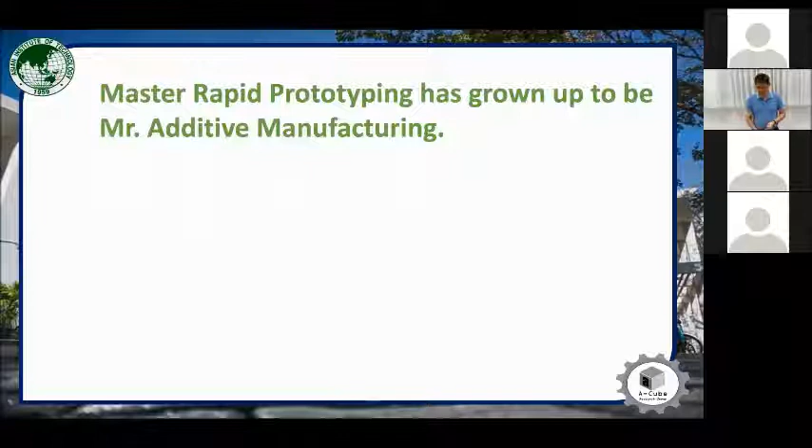If we think of additive manufacturing as a person, additive manufacturing today is an adult who, if in industries, would be at the senior, engineer, or manager level. If additive manufacturing is in academics, we have Doctor Additive Manufacturing. From the beginning, we have had Master Rapid Prototyping. Master Rapid Prototyping has grown up to be Mr. Additive Manufacturing, and today Rapid Prototyping is 31 years old.

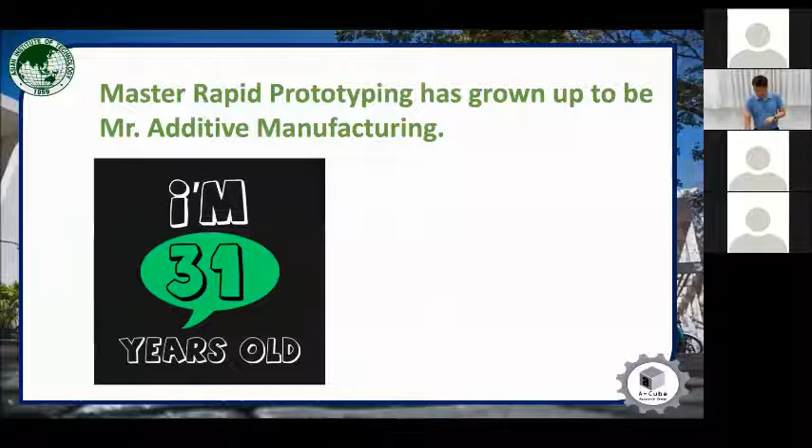With the process of rapid prototyping, we create an object layer by layer from the ground up. But the question is, if we look at accessibility, do we have the same manner, where there is a connection from the ground up, from the kid up to the professional level? The question is: who has had access to additive manufacturing?

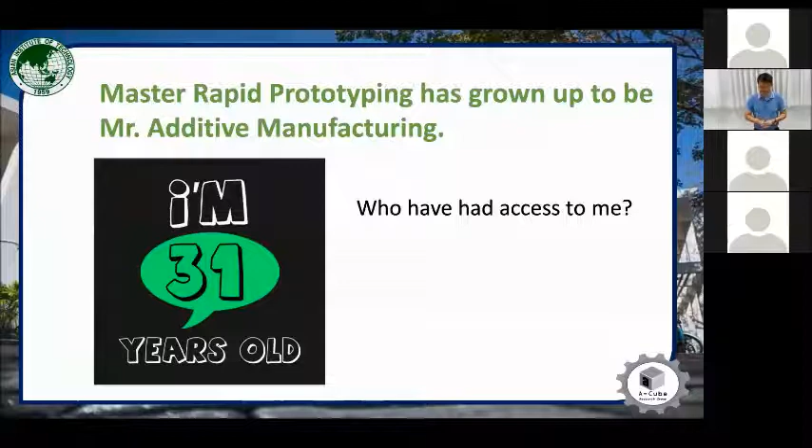Well, in the old days, when we started introducing rapid prototyping, we had SLA in '88, SGC, and FDM in '91. We had SLS in '92 and 3D printing in '93. During that period, when we started introducing rapid prototyping, we had big, very expensive machines, and accessibility was limited to professors and researchers at top research universities as well as research institutes. It might also be that some big companies had access to these types of technologies.

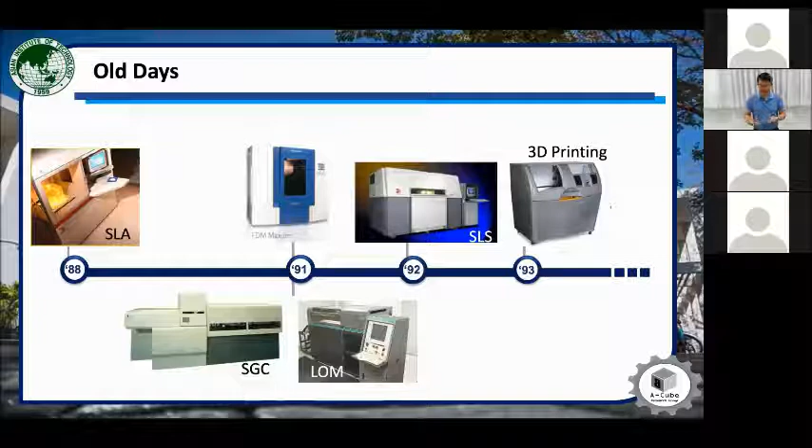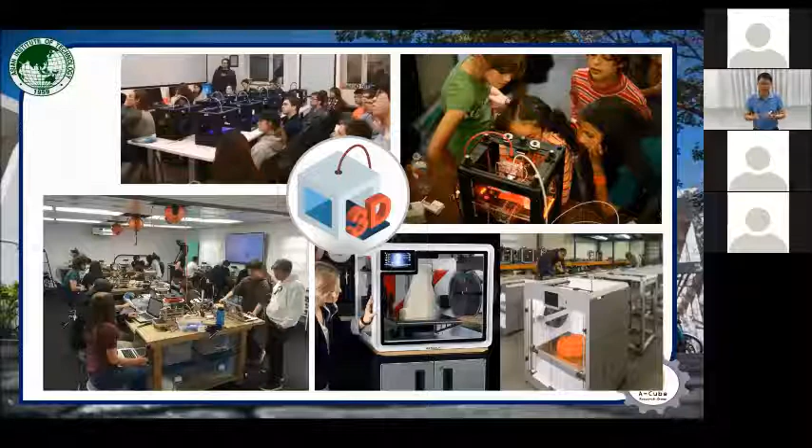This technology has progressed day by day, and because of its potential, many tried to develop their own. But the growth of rapid prototyping was not that much until the beginning of this decade, when the patents for all the IP expired. From that point, you start seeing that many more people have access to rapid prototyping or 3D printing. From having a unit at a research university, now we can have rapid prototyping or 3D printing in a classroom, in a teaching university, even in schools. We can also see these technologies not only in a big company, but also in a small and medium enterprise.

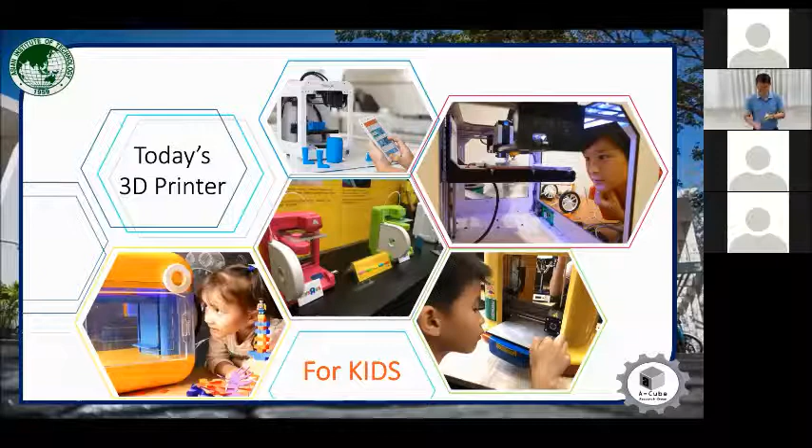You can also see that the trend of rapid prototyping will not be only for commercial purpose or research purpose anymore, but it will gradually go to the level that even kids can play with it. One day 3D printing will be in our home, just like we have a microwave.

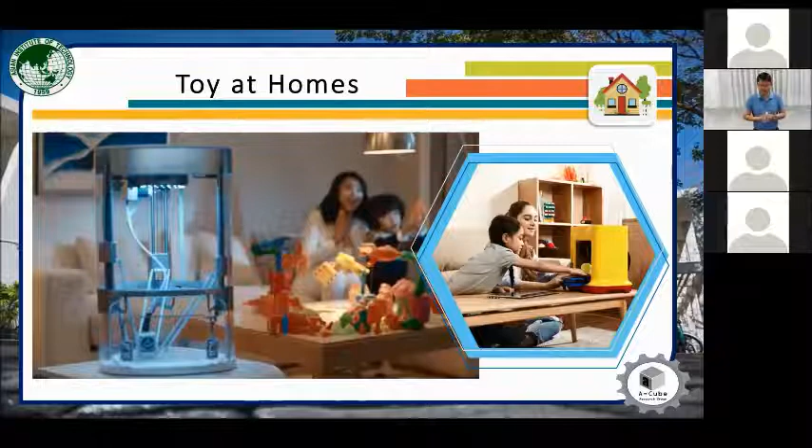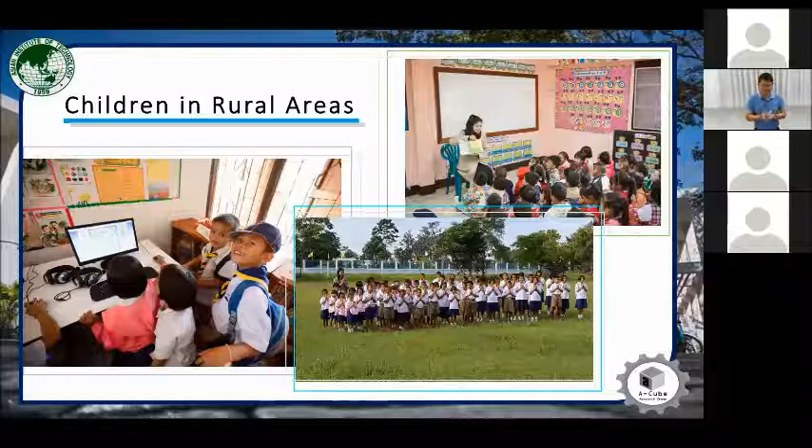But the question is, how about for this group of kids that live in remote areas? Will they have the opportunity to enjoy the power of these 3D printing technologies? In order to have that, what can we do? The question will be, will we be able to bring this unit of inexpensive rapid 3D printing to our kids? The price of this unit these days will probably be around $500. But with this unit, can it be sustained for kids in rural areas? Sustainability becomes an issue that we have to address.

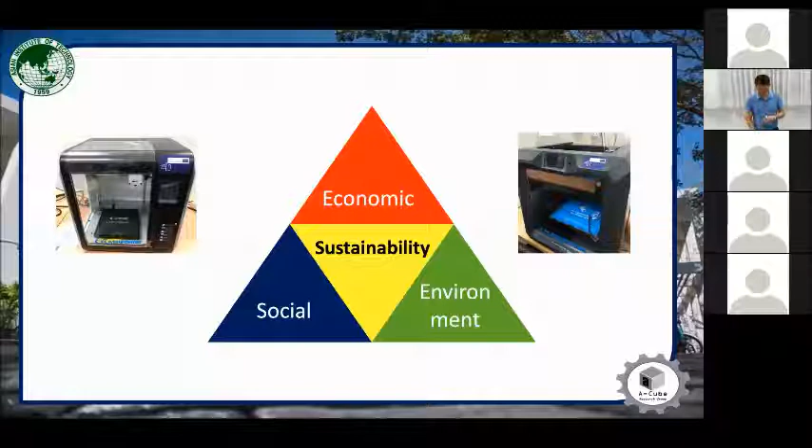When we talk about sustainability, there are three dimensions: economics, social, and environment. For the social dimension, of course it's not an issue, because our kids can express their creativity and interact with each other, and because of that we can help build the future human resource for the countries or societies. In terms of environment, the material used in this process is non-toxic, so in terms of sustainability and environment, it will not be an issue.

But in terms of reuse, we have questions, because these days the material we often use will be PLA or ABS. Even though PLA is biodegradable, it will take some time before all the material is decomposed.

But what's more important will be in terms of economics. What we need are inexpensive systems or machines such that kids in rural areas can use. In terms of the machines, I think right now the machine is not that expensive, but the question is, can we sustain the usage of this machine for kids?

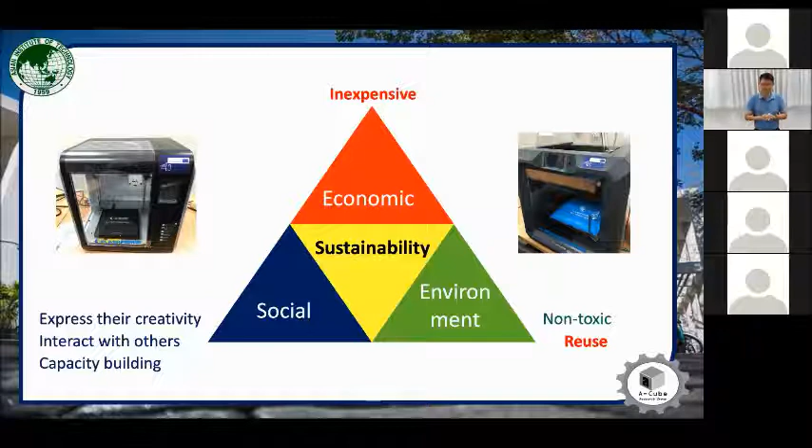Because the problem kids will have to deal with is about materials. Materials like PLA or ABS are consumable, and you have to replace them one after another, just like with a printer. The price of the printer itself is not expensive, but you have to pay much more money for the ink. Similarly with 3D printers available in the market, the machine itself is not expensive, but you have to keep buying materials, one spool after another spool.

The question for schools in rural areas: how much budget will they have? Will they have a budget such that they can allow kids to use the machines every day, whenever they want? This will not be possible, simply because the budget for buying material for kids to play will be very limited. So in terms of sustaining accessibility for kids, it's not an issue of the technology, but an issue of running the technology, and what needs to be done is we have to explore.

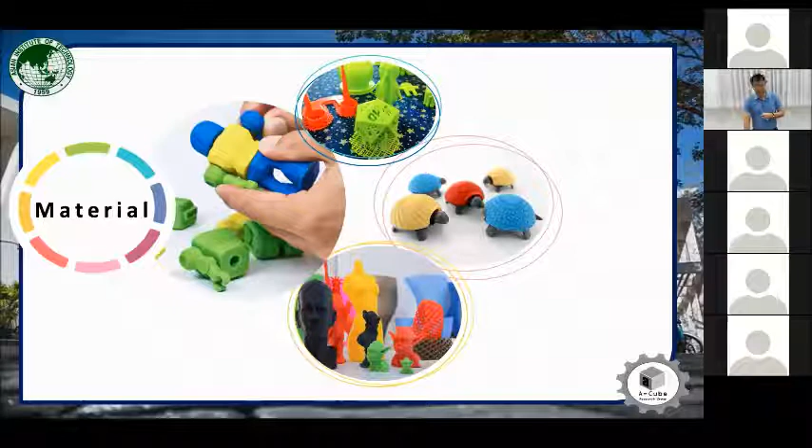We have to find another type of material that can allow our kids to keep playing day after day, which should not be PLA or ABS. We then started exploring, and believe it or not, the material we found is something you're also familiar with - modeling clay.

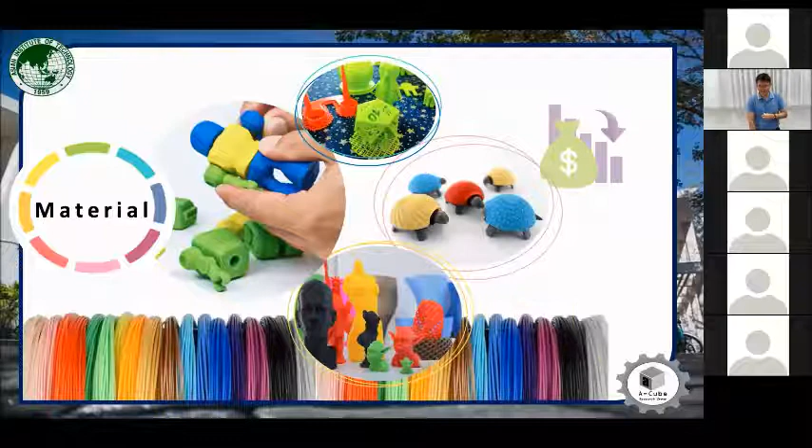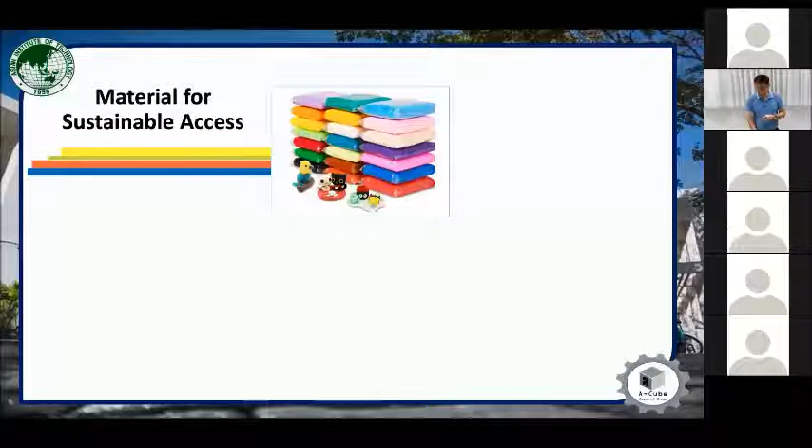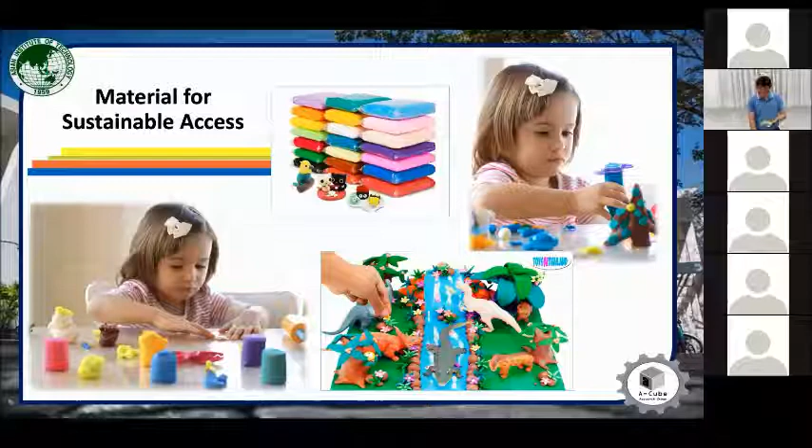The material for sustainability, or sustainable access, is modeling clay. This clay or plasticine is a material we all played with when we were children. With these materials, you can bring in your creativity and start making things, building things one after another, creating a story and enjoying it. When you get bored, you just squeeze it out and remake it into another thing. With this type of material, kids will start with their imaginations.

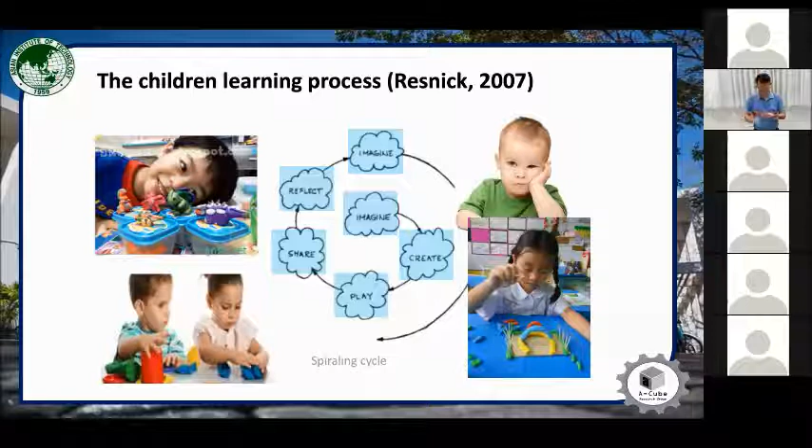Then they will start creating with their hands. They will play with this unit and share the toys with others. Then they reflect on what they have just learned, and the process of kid learning will be spiraled to the next level. You will see that with these types of materials, kids can always play and always express their ideas.

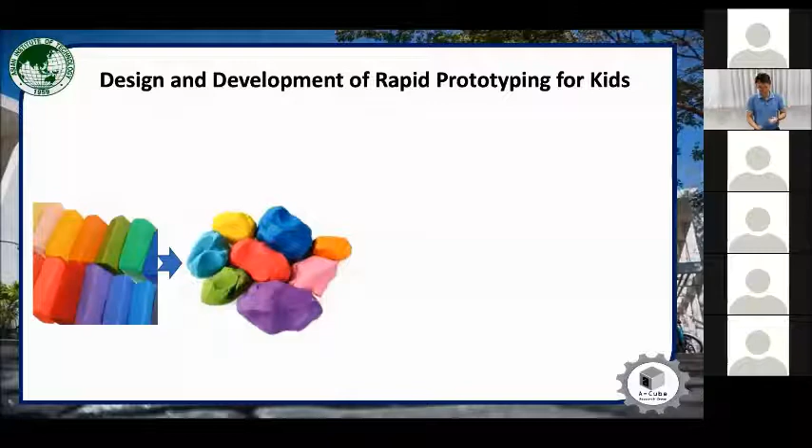And if we bring this modeling clay into the equation of rapid prototyping or 3D printing, then what we need to do is unpack all these pieces of modeling clay, squeeze it, and put it into a tube. Then what we have to do next is basically extrude it.

Can this idea be implementable? That is a question. So if we can do that, then there is a chance that we can use this type of material in our extrusion-based rapid prototyping for kids to play.

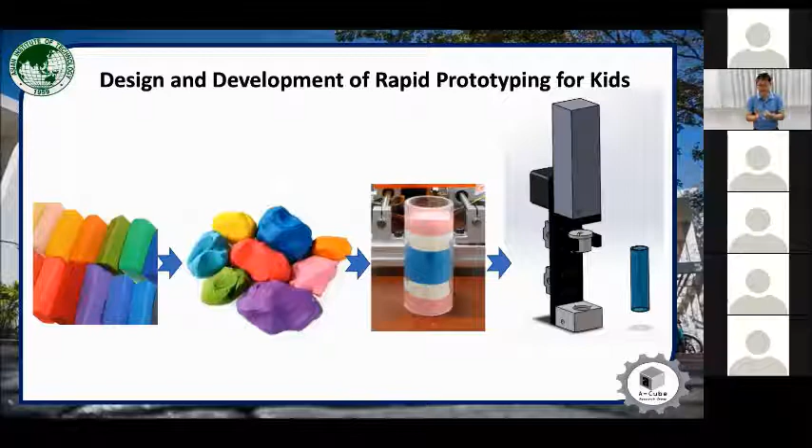From this kind of idea, we then start exploring. We start building out CAD models of a unit. You will see that a unit is not that fancy stuff - it's just a basic, simple unit that has a plate that moves in the XY directions. If we move in the Y direction, then the nozzle head will move in the X direction, and the whole unit can be lifted up and down in the Z direction.

If we just extrude the material through that nozzle, then we can start laying down the material just like FDM. From this idea, we can convert it into 3D printers for kids, which might look like miniatures.

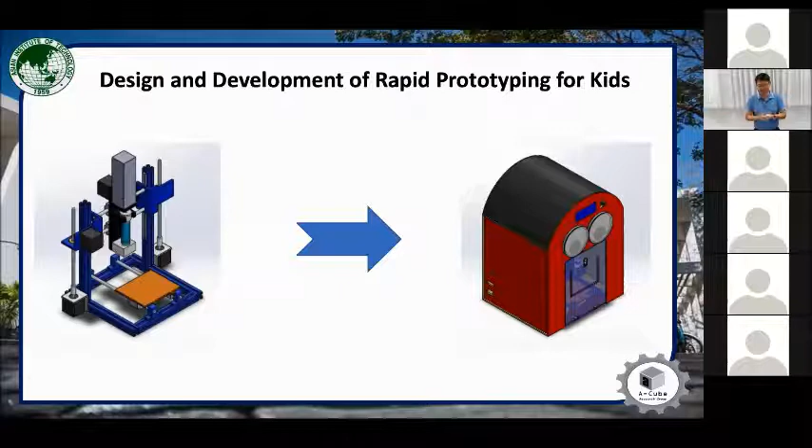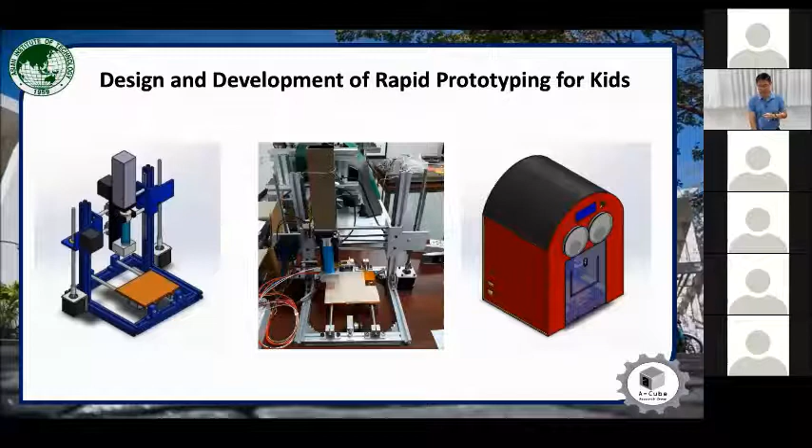When we start building up this unit, what we did next is investigate process parameters to see whether or not we can really make an object from this modeling clay through the concept of rapid prototyping.

So from this point of view, we're seeing that if we're going to make it happen, one of the things we need to do is heat up the base before we start the process.

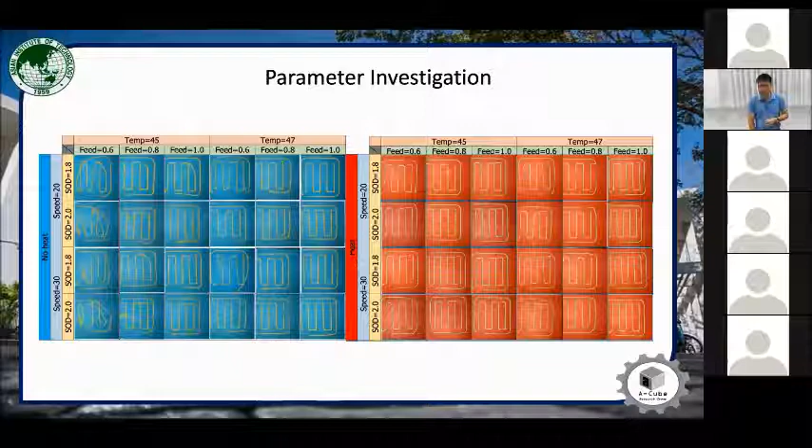Then we moved on and looked into what should be the speed, what should be the feed rate, and how about the temperature we should use to melt the modeling clay. We investigated all of these things just to see which kind of pattern would be the most appropriate.

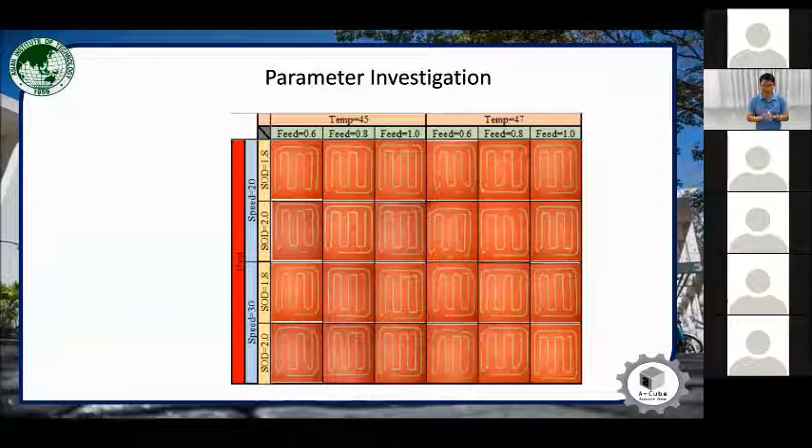We then conclude that at this point, with the temperature around 45 degrees Celsius, a feed rate of 80%, a speed of 30 millimeters per second, and a standoff distance of about 1.8 millimeters from the collectors, and if we also heat up the collectors, we should get a good looking pattern on the collectors.

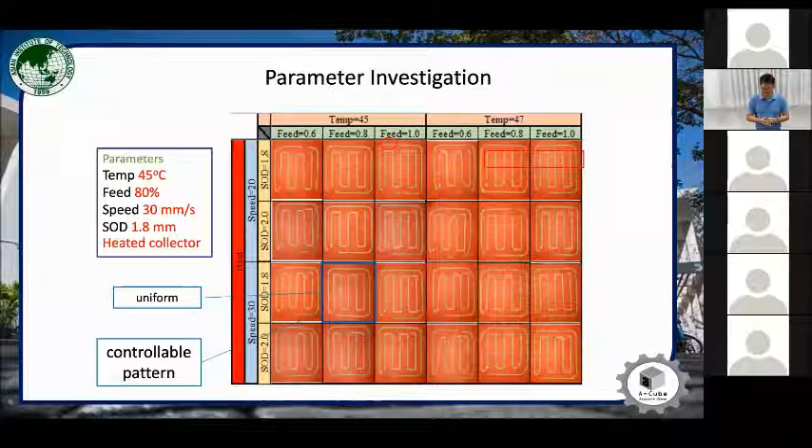Kids can explore from the websites, search for the model that they like, or if they have the abilities, they can start working on designing all these things by themselves and then load onto the machine.

At the end, we just print modeling clay. With modeling clay, when you don't like it, you just squeeze it, put it back into the tube, and reprint it again and again. One pack of modeling clay will cost you less than 50 cents, so kids can keep playing one after another. With that, there is a high chance of sustaining accessibility for kids to use additive manufacturing.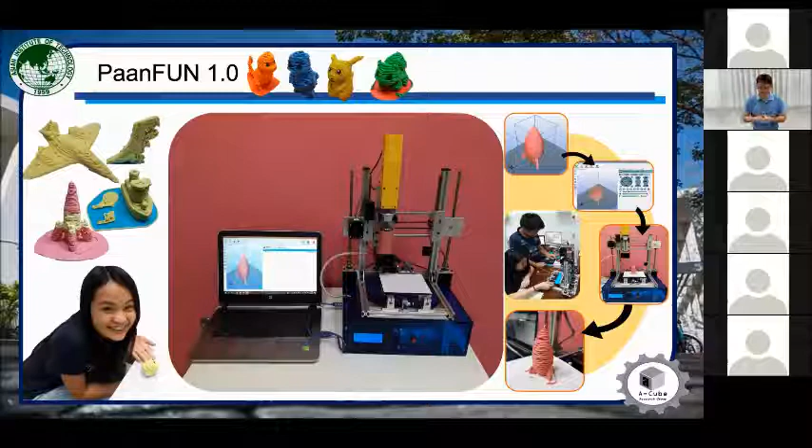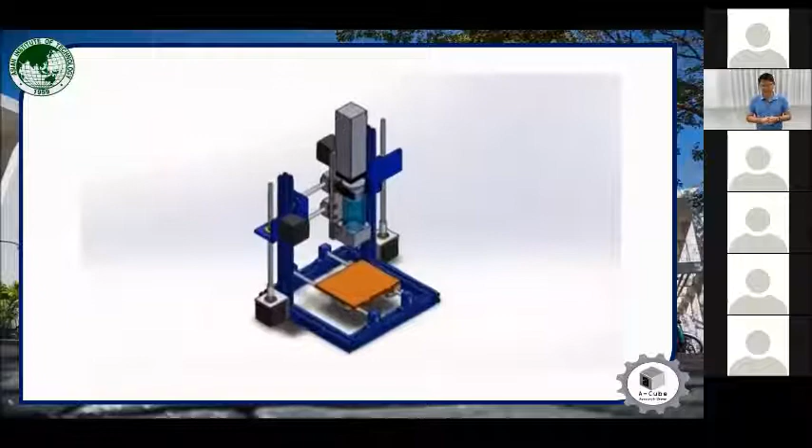What I want to show you here is how the unit is working. We call this unit PaanFUN, a Thai name meaning 'shaping a dream.' This is the design of the unit I showed you, and this is a prototype we built based on that design.

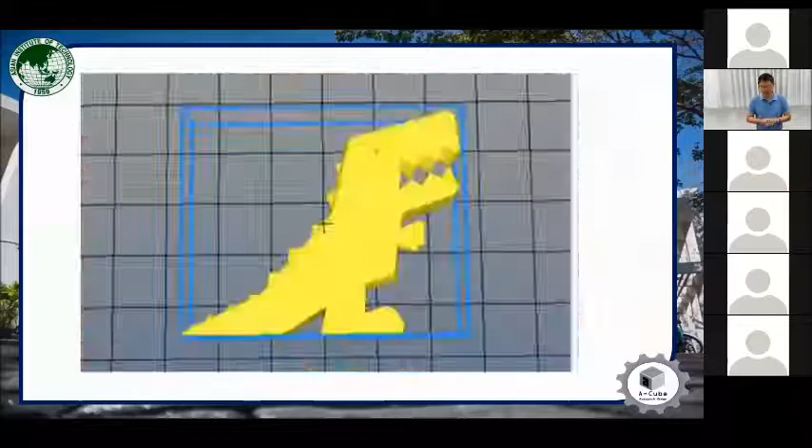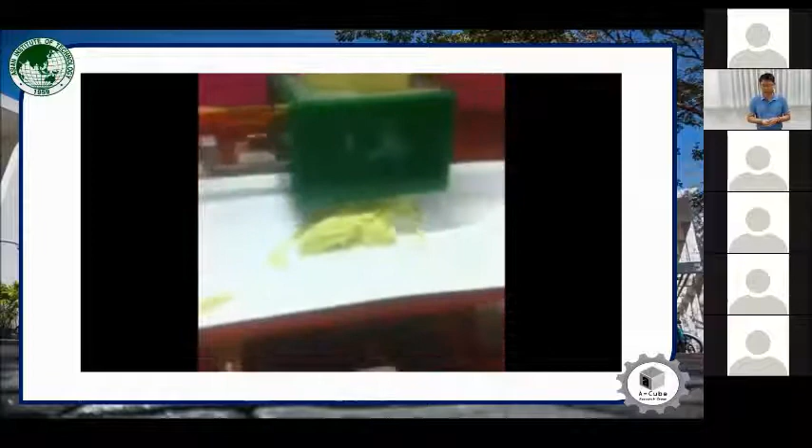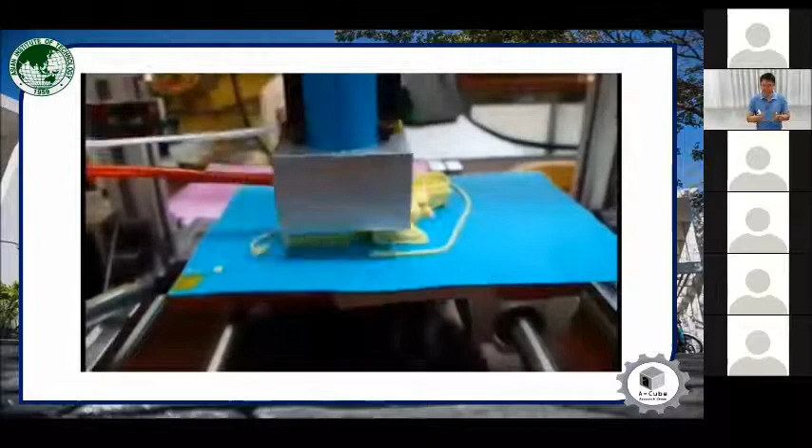The material is put in the tube, put on the unit. We create the models and then just click start. The machine will start running and printing modeling clay out of the nozzles. That's simple. So the technology isn't that complicated, but the material we use allows kids to keep playing with this unit.

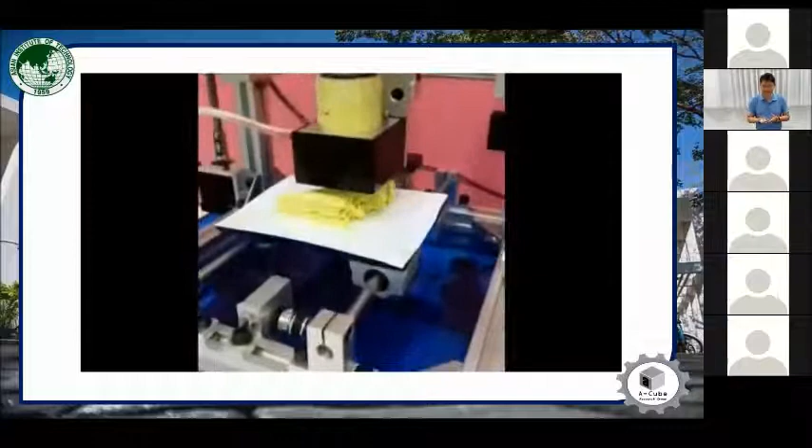When kids play with this unit, the cost of playing is not that high. They can keep playing day after day. They can buy different colors of modeling clay, start creating their own story, and use this unit to build the part piece by piece, enjoying their creativity.

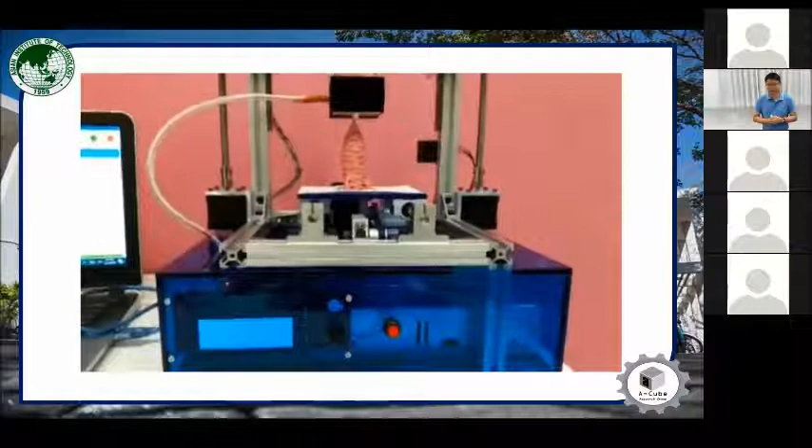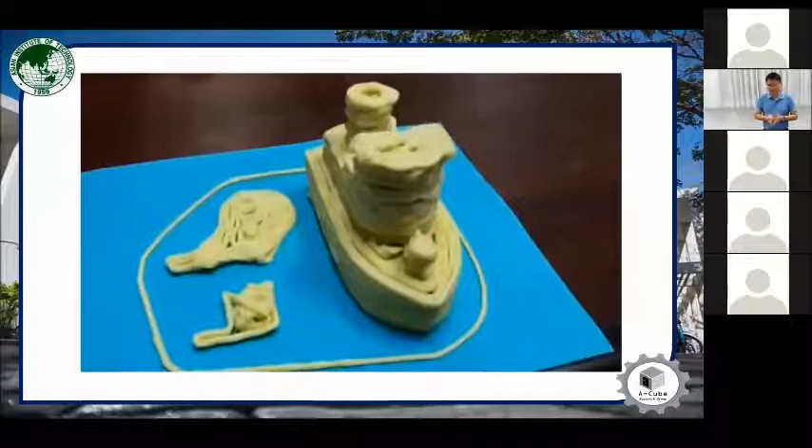This is the final product out of it, and we're able to build or make different types of cartoon characters, which helps kids explore their creativity.

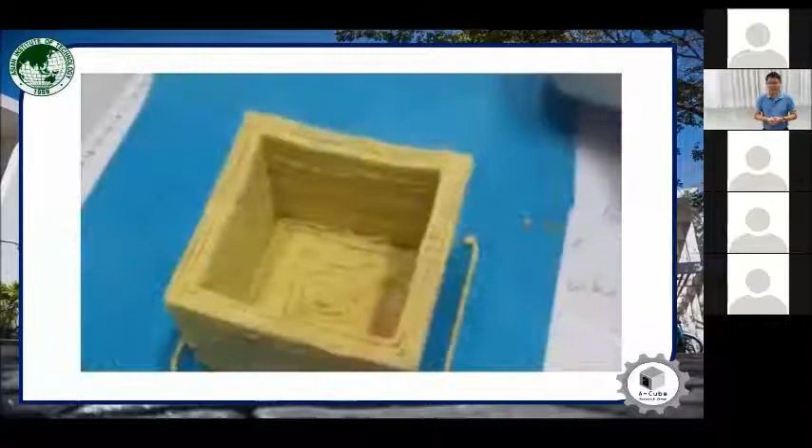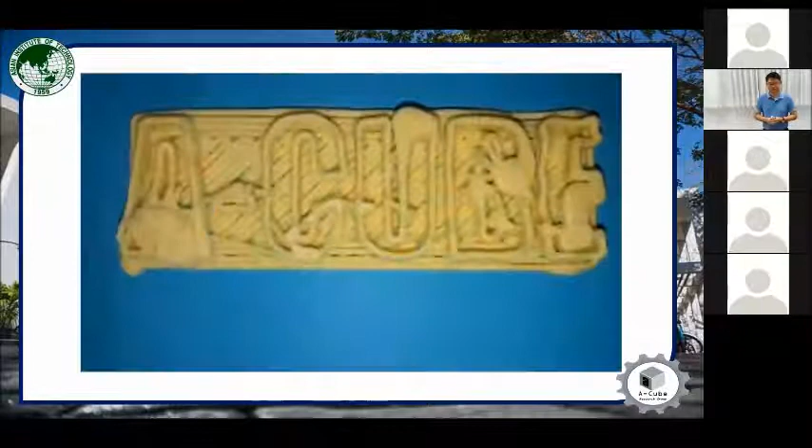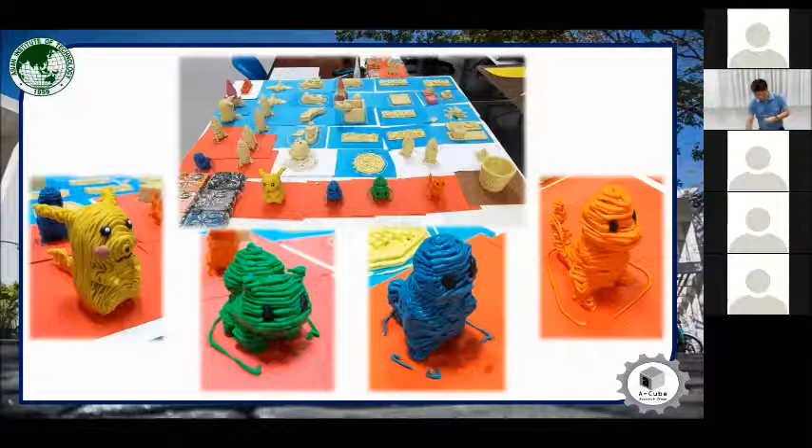After we tested that in our lab, we wanted to share this script. I told you at the beginning that I have a dream that Thai kids should have the chance to be familiar with this unit, so we contacted a company — in this particular case, SCB, Siam Commercial Bank in Thailand. They helped us by providing the funding to build 3 units of this.

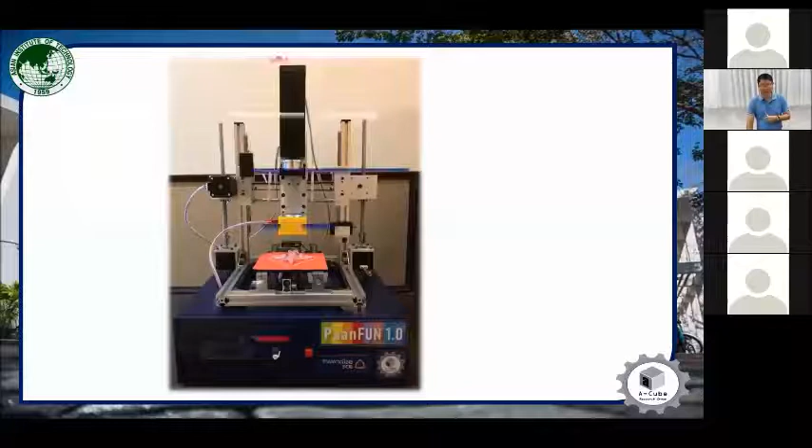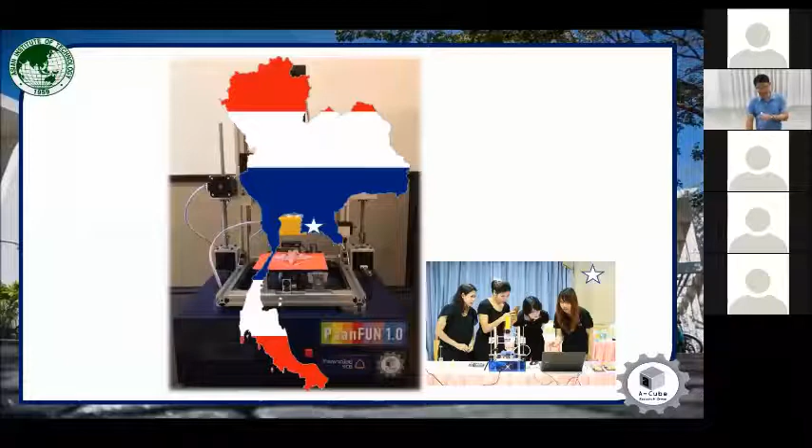After we built these units, we went to several schools in rural areas. First, we went to the east part of the country. We gave this unit to the schools and trained instructors there on how to use the machine. After finishing this, we moved up north to other schools and did the same thing.

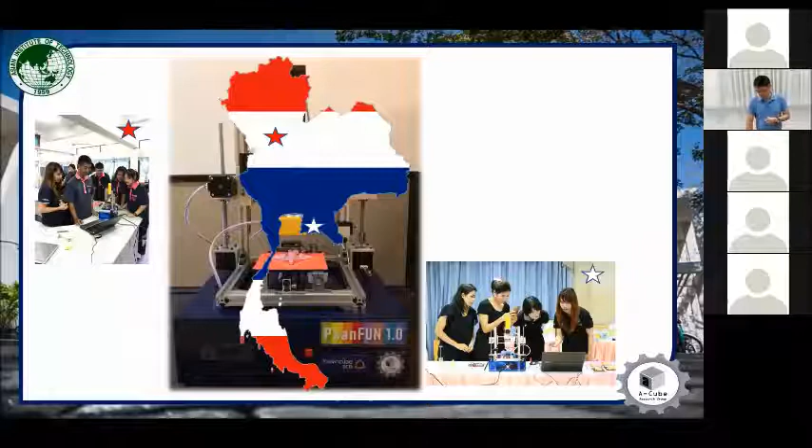We gave the machine to the schools and trained instructors as well as students there, so they know how to use the unit and can become our ambassadors to train other students. After that, we also moved to another part of the country. So far we've built 3 units and given them to 3 different schools in different parts of the country, but this is just the beginning of our journey.

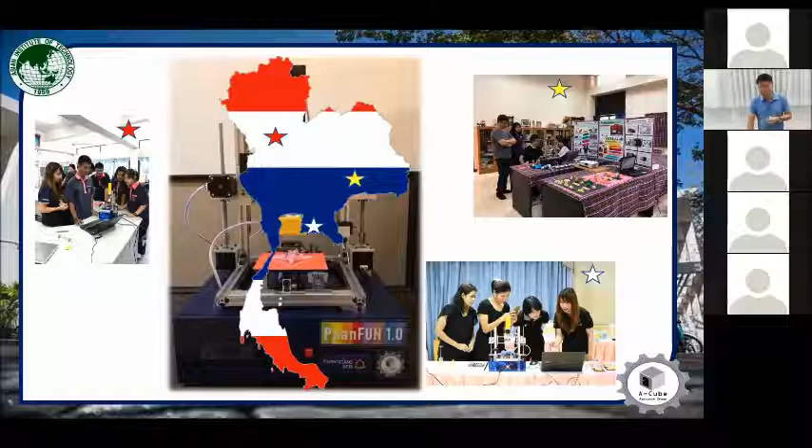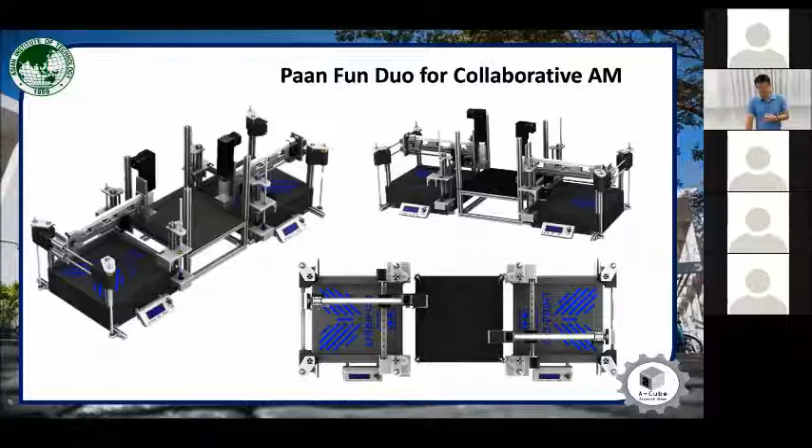I want to finish my talk with this: all kids have creativity. What they need is opportunities. And more importantly, they should all have the same opportunity. Thank you very much.